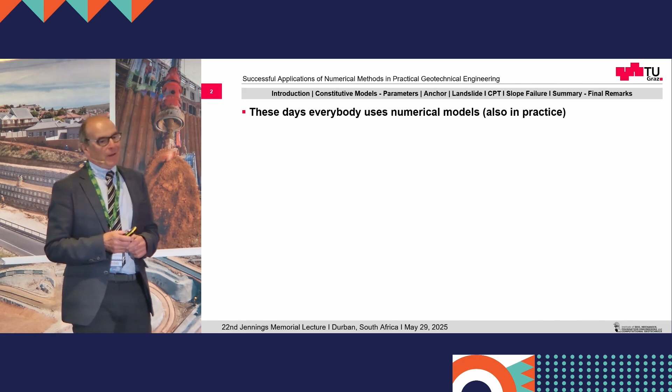Now, I'll start probably a little bit controversially by saying these days everybody uses numerical methods. But is it done because your client asks you, please provide a few nice, colorful pictures? Or do you really do it to get a better understanding of your problem? Now, I can see that there's still a bit of skepticism about the usefulness of numerical modeling amongst practitioners. Some people say, well, we don't have the parameters, etc., etc. There is skepticism about it.

But the goal of this presentation is to show you that numerical models can provide useful insight into practical problems. And that's why I keep most of it on showing you what we can do in practice, although I will give a bit of

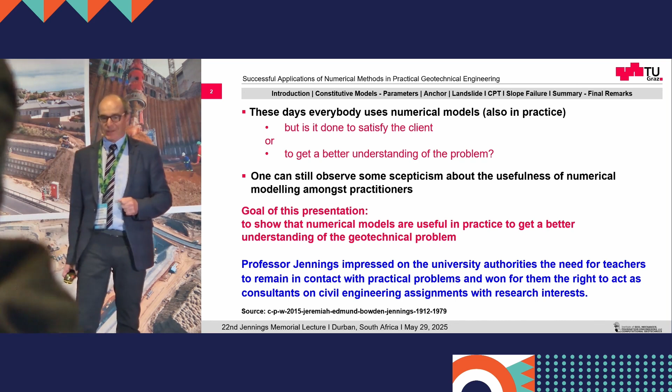an introduction. Now, I tried to link this to Professor Jennings, and I found this quote: when he was professor at the university, he insisted, obviously, that he's still involved in practical problems. And I think that ties up, or at least I try to tie up this with my lecture, because I'm also at the university, but we try to keep in contact with the so-called real world and provide solutions for them based on the research and teaching we do.

Now, the outline of the lecture will be: I give a short introduction, and I make a little bit of a note on constitutive models and parameters, because that is still something which causes some issue at some stages.

But at the end, I will concentrate on these 4 examples: an anchor load test, a slow-moving landslide. I on purpose call it slow-moving, because in Austria we sometimes tend to call everything we don't understand creep. But it's not only creep, it's much more to it. I had a lot of discussion on that in the institute sometimes.

Then I do a bit on a cone penetration test, and finally I finish off with an analysis of slope failure, again showing that numerical methods can do better than conventional methods. And then I come up with some final remarks.

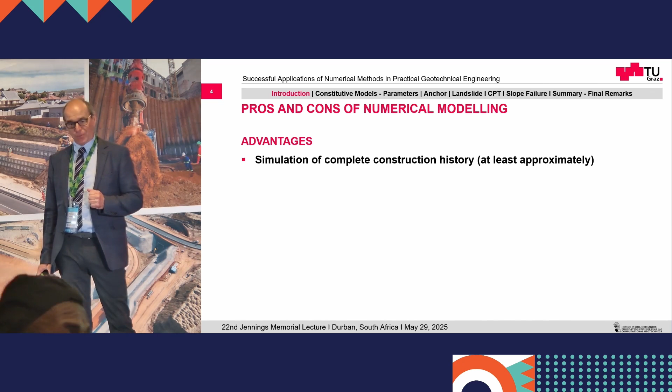Now, if you look at pros and cons of numerical modeling, the advantages are clearly you can simulate the complete construction history, well, at least approximately. I usually tell the students, or if we give courses for engineering companies, that if you are the one responsible for the analysis, if by any chance you have a chance to go on the site, then please go on the site. It looks slightly different than on the computer, okay? But at least approximately we can do everything.

The nice thing is we can do the interaction with water rigorously. That is a big advantage. And of course, you can do drained analysis, undrained, consolidation, etc. This is not a big issue anymore today. It was some time ago, but now all the codes available commercially can do that.

You can model almost any geometry. I will show you just a few slides in a few minutes. So there's almost no restriction on the geometry. If you have advanced soil models, they will capture important features of soil behavior. No model is perfect, I come back to that also in a minute. And you can take into account soil structure interaction, which is also very, very important. So all these things you can do.

And on top of it, if you look at failure, you don't have to postulate any failure mechanism. It will come out automatically from your analysis, which is quite a good feature, I would say.

Now, a colleague of mine always said there's no such thing like a free lunch. Okay, so if you get invited for lunch, then the guy wants something from you. And that's the same thing here. There's nothing for free, okay? You have a few disadvantages.

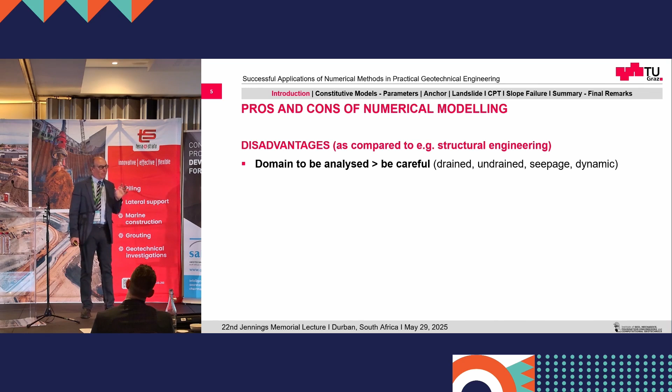So, for example, and that may look strange for you at the moment, but the domain to be analyzed is in geotechnical engineering not so clear. If you have a structure, if you have a bridge, you have the bridge, you have the geometry, the material, you have everything. But in geotechnics, if you have a deep excavation, a tunnel, how large is the influence zone of your structure? It's not always that cut clear.

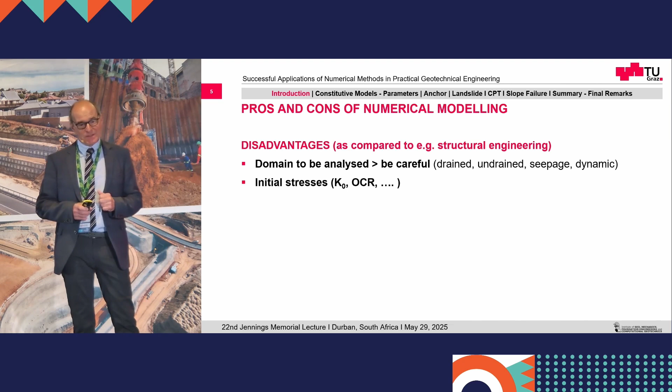Again, you have to be careful when you do a drained analysis, an undrained, seepage, dynamic. This also poses challenges on your domain. Initial stresses are sometimes difficult to assess. So we have to interact with the geologists and with experience with the rock mechanics guy to get at least a rough estimate of K-naught, the initial stresses, OCR, etc.

There are always some uncertainties in ground profile and groundwater conditions, even if you have a perfect site investigation. I assume that you in South Africa also don't have a perfect site investigation, as we don't have in Europe. You always miss something. And that is there, but we can live with that, I would say.

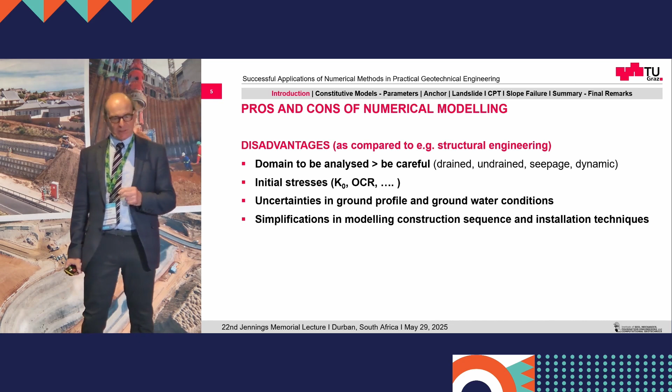We have simplifications in modeling of the construction sequence, I mentioned that already. And more importantly, in ground engineering installation techniques, we are still struggling in modeling construction of stone columns, etc., mixed in place, and so on. People are doing this in research, but it will take some time before that comes into practice.

So although the solutions are approximate solutions, that is always one we have to keep in mind, all numerical solutions are not exact solutions. But that's no problem, because we don't know the exact solution anyway. Because if we have a deep excavation here in Durban, who knows the exact solution? And actually, we don't care. So we have to have a good solution. It will be approximate. And that's why I think the pros really beat the cons.

Now, just to make clear, I'm concentrating here on the finite element method. But of course, you can find a finite difference method for people who use FLAC. To some extent, boundary element method, and also we have this discontinuum-based methods like the discrete element methods. They use it quite a lot in rock mechanics, but you can also use it, for example, in investigating soil behavior at a small scale, like investigating detailed grain-to-grain contacts, etc., in laboratory testing. But I'm concentrating here on the finite element method.

Now, just to show you the development we had within 35 years, this was finite elements in geotechnical engineering 35 years ago.

It's part of my thesis, actually. We had 20 elements, 25 elements, and for these meshes we had to send it overnight to the computer center in Manchester. You won't believe it—today if Rocscience or Plaxis or any other code had an Android version, you'd actually solve it in the coffee break on your mobile phone. So that is what we had: few elements, very simple constitutive models, no user-friendly codes. I remember the students, when we started doing this, after 6 weeks they probably got the first results because they had to fiddle around with the mesh and everything.

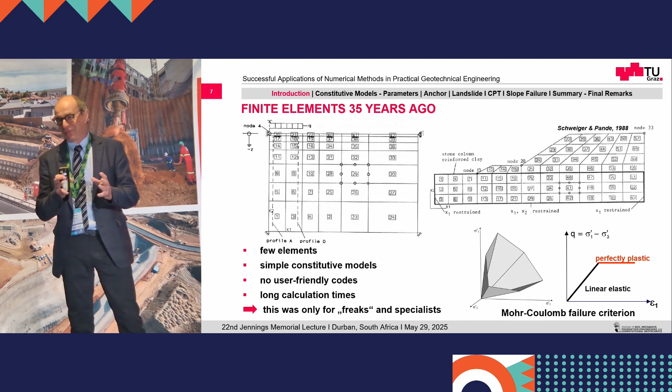Now we have this, now this is different. So this was really for freaks only, okay? I think you call it nerds these days.

Now, the last sentence here is: everybody can do it, but not everybody understands it. So when we give courses for practical engineers, sometimes we realize that they, in particular the young guys, are very nice in handling the code, but don't always understand what they're doing. And that is what is important. It is only a tool. Finite elements won't solve any problem for you—it's just a tool to solve it.

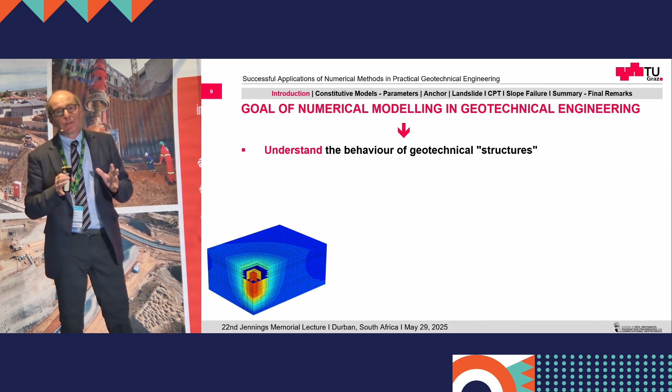Now, to sum this up, the goal of modeling is to understand, and that's what I put on the first line here: understand the behavior of geotechnical structures. So don't be too picky on the numbers in the first place—try to understand the complex behavior of your system. But of course, at the end, we want numbers for design: we want to calculate the displacements under working load conditions, we want internal forces for design, and we want to identify possible failure mechanisms. Now, I think we can achieve this.

But we need appropriate geotechnical models in the first place. So that is what I want to emphasize here. Before you go into the computer, you have to really consolidate all your knowledge, wherever it comes from, to make an appropriate geotechnical model, because already there you do some simplifications. You will never be able to model your soil profile or your situation in a perfect way.

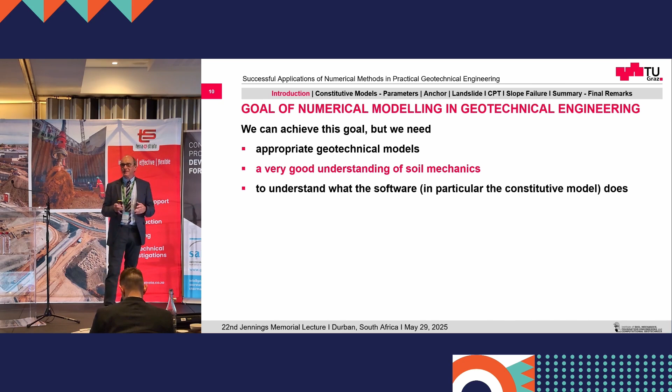And then this is again in red: you need a very good understanding of soil mechanics. Some people think, 'I buy one of these codes, that's fine, and I get rid of all the soil mechanics'—but no, it's not. You need a proper understanding of soil mechanics because you need to know how you transfer soil mechanics principles into computational geotechnics, and you have to understand to some extent what the software does, in particular the constitutive model. You don't have to be an expert in solving equation systems of 1 million unknowns—that's done, the codes will do that automatically—but you have to understand some principles of how the code works.

And you need a clear picture of what you can do and what you cannot do. Again, I put it in red here: we do models, we do not do reality. We try to put reality as close as possible into our model, but it will never be perfect.

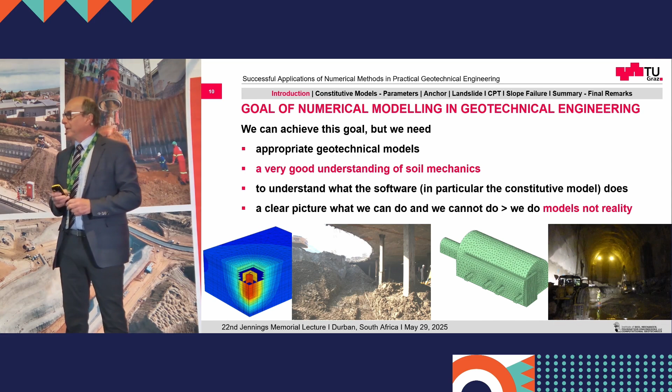So this is an example here, I think, from an excavation with a deep foundation in Bucharest—if you look at the site, it doesn't look like this on the computer. And here, for the big cavern we did for a power station, it's all inside the rock. This one we did a couple of years ago; it took about 10 days to run because the client wanted all these adits and things put into the model, and we had about 180 construction phases to model. So that was it.

Now, just a few words on the constitutive models.

Many people still think we can get away with Mohr-Coulomb. Now, Mohr-Coulomb, strictly speaking, is not a constitutive model. It is a failure criterion, and as such is not too bad, for drained conditions.

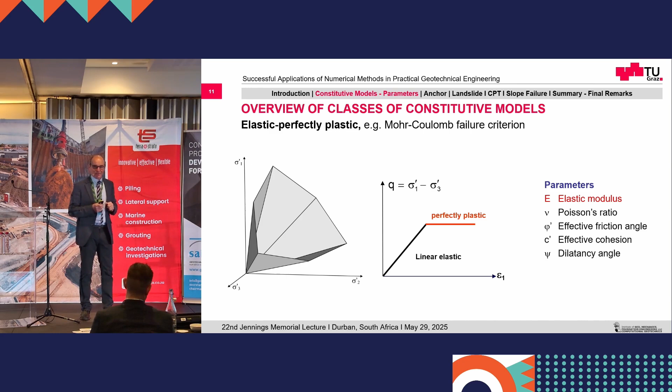Now I'm questioning you a bit. So the last line here - if you do a geotechnical report, how many of you define the dilatancy angle? Hands up. I think it's about zero. But I can assure you it's the same thing in Europe. Okay, but once you do your analysis, you have at least to think about it. Don't take what the codes do as a default value automatically.

Now we're doing better. If you just want to go for failure, Mohr-Coulomb may be fine - again, only in drained conditions, not so in undrained, in particular for normally consolidated soils.

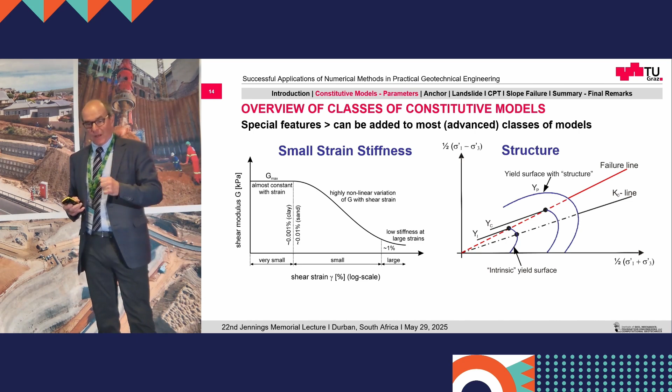Now, something which I do not understand - why it is not more popular - is to take into account structure. I will show it in the CPT example later on. This is clear that most clays in situ have a structure, and you can model that relatively easily by just introducing a second yield surface on top of the intrinsic yield surface.

So I would say for standard problems like tunnels, deep excavation, basically the constitutive model issue is more or less solved, I would say. Well, there are some details, but once you go into cyclic loading, offshore, and these sort of things, you have to be careful, and there's still a lot of development going on.

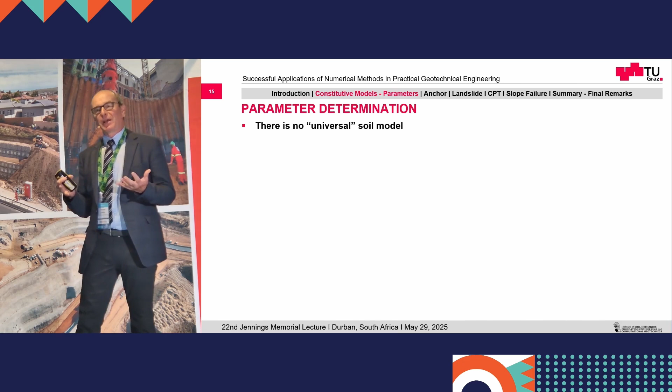Okay, now parameter determination. That's an issue which sometimes prevents the application of numerical models in practice because people say, well, I don't get the parameters. Now, first thing - there is no universal soil model. So if any researcher or company wants to sell you this is the model for soils, forget it. It's not true. We have models which work better for sands, which work better for clays. We have models who work for both reasonably well, but there is no universal soil model.

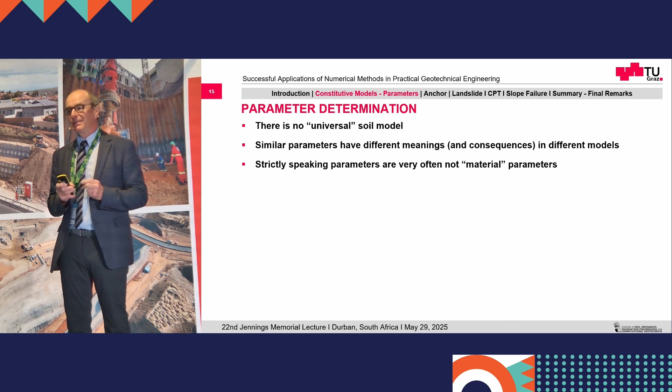The problem is sometimes that similar parameters have different meanings and consequences in different models. That is what I meant earlier on. You have to understand what your code does with your parameters in a particular model. Strictly speaking, when we talk about material parameters in geotechnics, they are not always real material parameters.

Let me give you a simple example. If you have a quartz sand, the material is the same whether it's in a dense or loose state. But if you use a constitutive model, you will input a different stiffness for the loose one and for the dense sand. So if you go to the mechanics department at university and tell them this, they say, what are you doing? These are not material parameters, this is a mixture of material and the state the material is in. So that becomes a bit tricky.

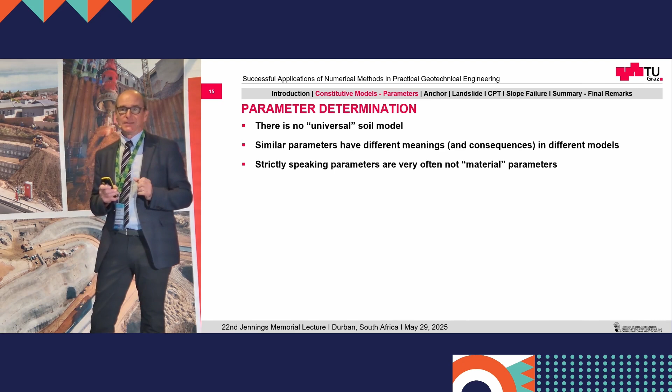There are models around that can do that, but they are not easy to handle. So from a practical point of view, we are used to living with these assumptions and simplifications, and there's nothing wrong as long as we realize our limitations. If you're aware of your limitations, you will do the right thing.

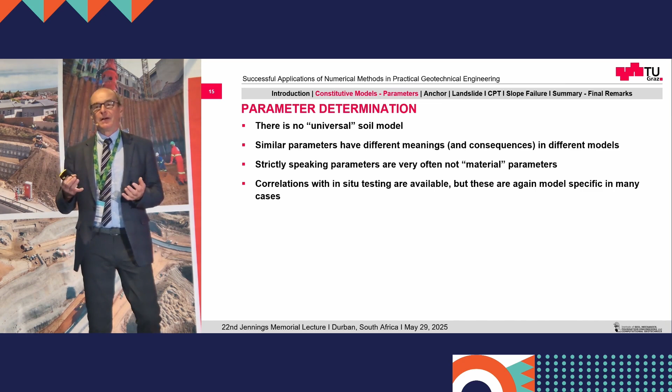In situ testing - I'll come back to that in a minute. The problem we have in laboratory testing is sample disturbance. For example, a typical soil we have in Austria, from the oedometer I have to multiply the stiffness by 3 for the finite element solution, because otherwise the client says if that's correct, I cannot build it. We know it's not true, because the soil is very difficult to sample, so we need some adjustment on that. So I'm a little bit more in favor of in situ testing, and I'll show that later on. It's also not straightforward, but I think you can get something out of it.

This is an issue that comes because usually when you do the site investigation, you don't know what tool you will use for the design, so you cannot steer the site investigation to get the parameters you need for the model. That's just how it is.

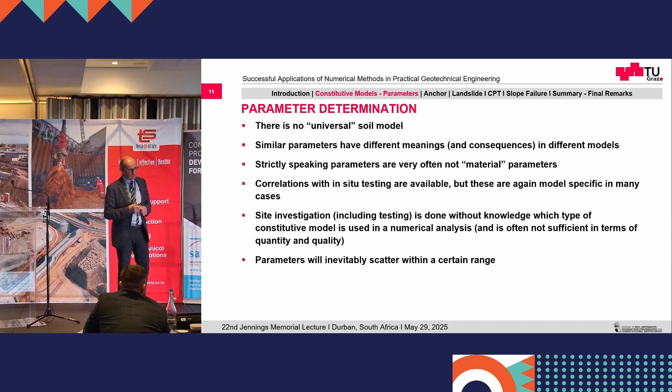Of course, whatever we do, our parameters will scatter within a certain range - there's nothing we can do about it. So this objective parameter determination for advanced models is actually not a trivial task. But a couple of people are working on it now, and at the very end of my presentation I will come back to that.

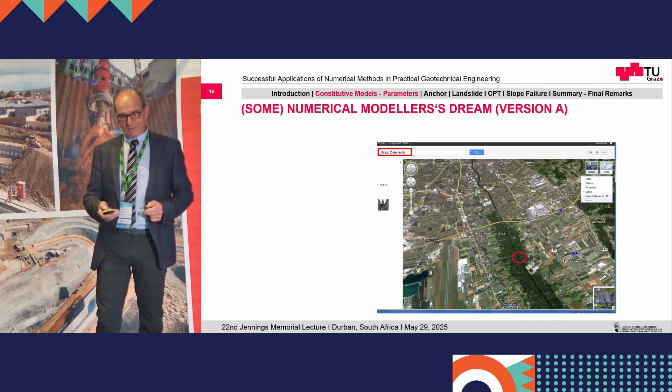First, let me show you something some young guys I know dream of. You go to Google Maps - sorry, I put my hometown, not Durban - you say this is the site here, you click on the site, you get a profile of your layers. That's already available in some places. But then you click on one soil layer, choose model A, B, X, and then you get all the parameters. That would be the dream, wouldn't it? Okay, it's not like this.

And I like this report from Mayne and others - is one number enough? I think that's really a question. You get a CPT, you get an SPT, you get one number, and then you build everything around it. I think it's not a trivial task.

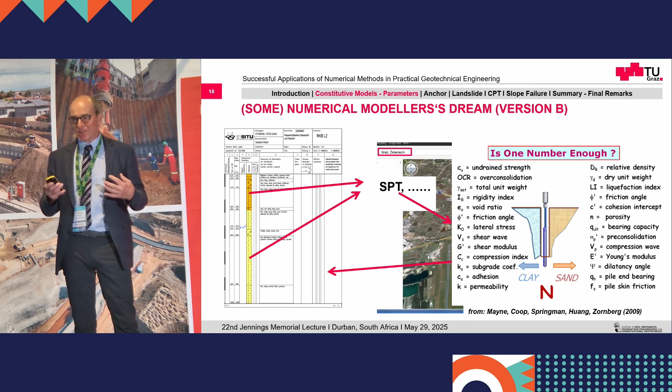Now people doing machine learning, neural networks, etc. are improving it, but I'm still a bit careful. One of the PhD students of my colleague is doing it now with in situ testing, with input parameters from a CPT.

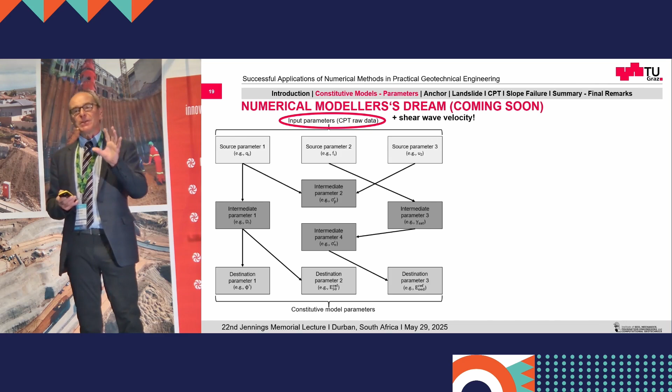So he gets raw CPT data, plus - and that is something I would really encourage you to do - if you can do a CPT, if your ground conditions allow, do a seismic CPT. Because then you get the shear wave velocity and the shear modulus at very small strains, and that is already a parameter from which you can build up the rest.

So what he does is he has programmed all the correlations he could find, and at the end he wants to get the constitutive model parameters. He called it an automatic parameter determination, using graph theory to get from one part to the other. And of course he has to input some restrictions so that you don't use a correlation which is valid only for clay and use it for sand.

So in the first step he's doing a layering. You can choose at what thickness you choose the layer from the CPT, and then he picks up that. But still, at the end, he may have 5 correlations for this parameter, so which one do you take? It's still a bit tricky to do, but that's something he's working on.

The one good thing is you can check how you arrive at the different parameter - it's open, all open. So you can check and trace how it arrives at a certain parameter. There are other people working on similar tools for this automatic parameter determination. It will be a step forward, but I see there's still a bit of work to do.

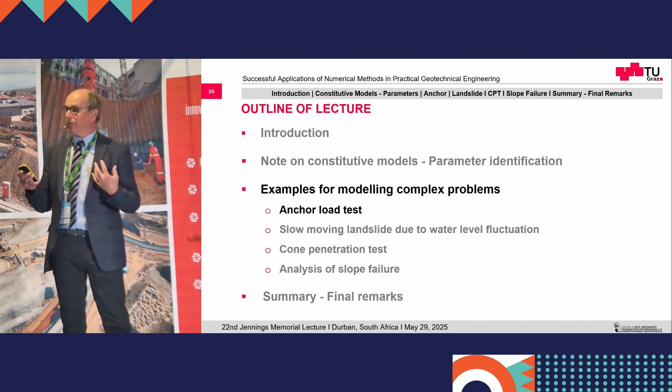Now, after this introduction, I will show you 4 examples. The first one is an anchor load test. And that was an anchor test only for research purposes, so it was not part of a construction.

So what we did is we installed the anchor vertically. And the nice thing here is that it was a ground anchor, so we had 12 meters of free length, 8 meters of fixed length, and 6 strands.

Now, it was part of a PhD of Carla. She came from Brazil, and you see here the snow. On her birthday, she had to accompany this test, so she remembers that for a while, I think.

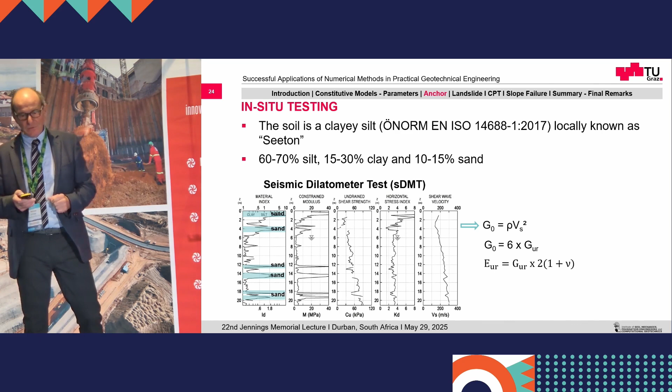Okay, so we had some site investigation because it was near a railway line construction, so we had a bit of site investigation. We did a CPT, we had a seismic DMT, and that means from the G0 we could work our way through G and GUR and EUR. For those of you familiar with this, we were using the PLAXIS hardening soil model here.

So since it was vertical, we could model it with an axis-symmetric model. We increased the K0 along the fixed length due to the grouting of the bonded length - we increased the K0 to 1. That's something we usually do. We have prescribed displacements at the top of the fixed length, so we didn't model the full free length, of course.

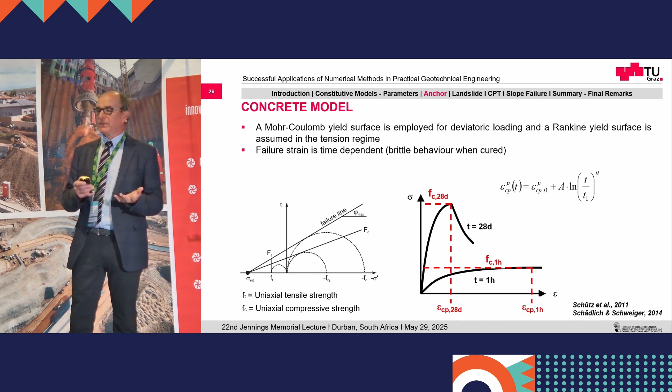Now, what we did with the grout, we modeled that with a model for concrete which was developed originally for shotcrete. So it can take into account the evolvement of stiffness and strength with time, but we switched that off here because one of the features we input into this model was that it could crack. So we had the peak strength, and after the peak you would have a decay of the tensile strength roughly to 0, because we wanted to see the development of the cracks in the bonded length.

And you need to remember this parameter HT. If HT is less than 0, it's still without cracking. If HT is between 0 and 1, it is cracking, and if HT is at 1, then it is at failure. So these were the parameters - I think I'm not going into much detail of that.

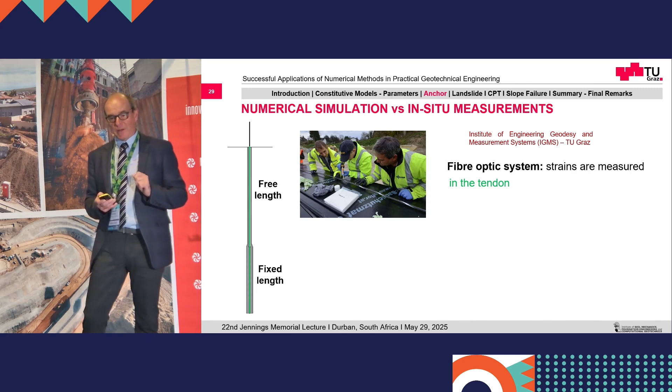Now, you would say, well, there's nothing new - I mean, we do fiber optic sensing, that's quite common now, and I think it's a game changer in monitoring. But what we did here, we applied the fiber optic sensors on the tendon, but also in the grout. And I think that was pretty new, because on the tendon some other people did it, but we wanted to check what happens in the grout as well, in the fixed length. So that's a bit of work on site, of course, because it's quite tedious to apply all this, but we did this in cooperation with Keller.

We got information on site and did the analysis before the test. When I saw this, I said I could retire because it won't get any better. But a couple years later, we realized we hadn't accounted for creep measure—when you do a load test, after a certain time you get 2 millimeters of creep and call it failure. We didn't take that into account, which is why it's a bit stiffer.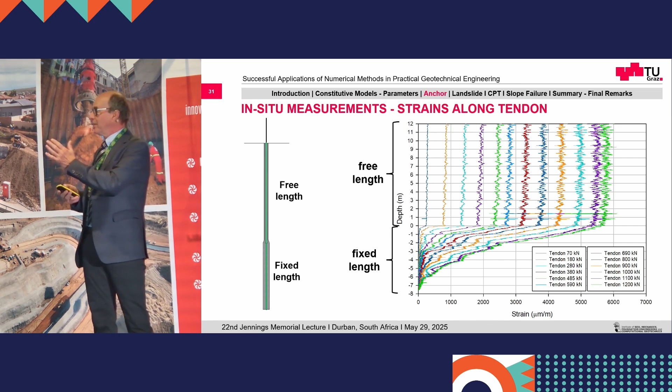But overall I think we did reasonably well. The nice thing from these measurements is you see the full anchor with the free length and fixed length, and from left to right it's increasing load. You see how much of your bonded length is activated at a certain load, and at failure the whole bonded length was activated—that's what you expect, though you wouldn't design for that. In this particular test, we could take it to the far end, which is very nice.

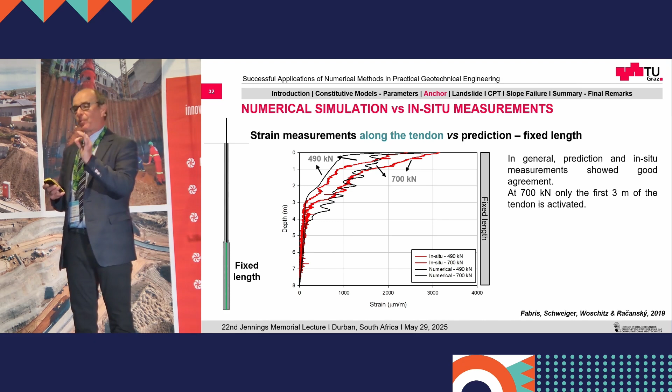If we compare at two different load stages the in situ measurement and the numerical analysis, we see quite good correlation. This zigzag is because at some stage we experienced cracks. The model we use is what structural engineers call a smeared crack approach—we cannot follow how the crack develops, we can just say this stress point has cracked. That is a limitation.

These oscillations in the measurements indicate cracks, and that's what you see in the analysis. I plot the HT factor here, which I mentioned before, and at higher levels you get a very high number for the HT, meaning you are fully cracked. That gives us some idea how these anchors behave.

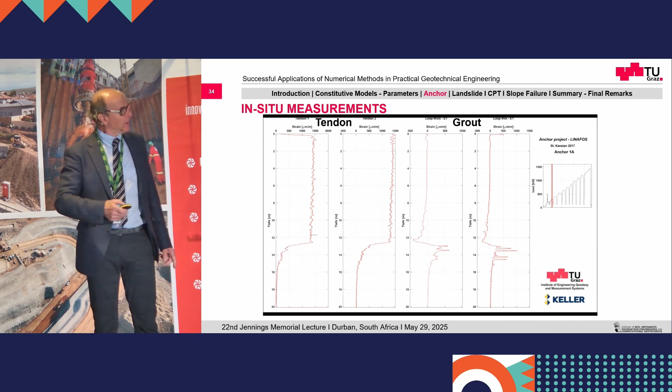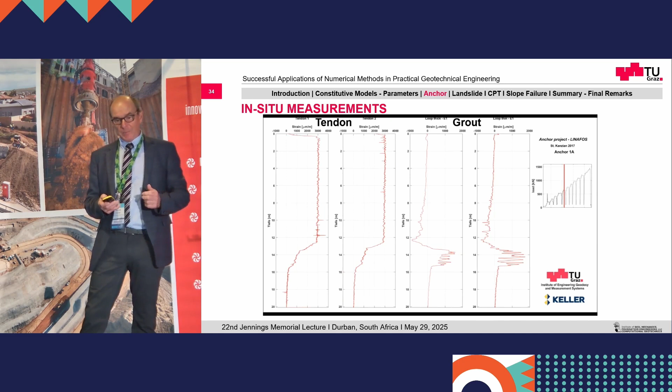I'll just show a bit of what you see on site—it's quite impressive. On the left-hand side there were two sensors, on the left and right, and in the small picture you see the applied load, unloading, and reload. You see the cracks coming in at some stage and how much you mobilize from your bonded length. To get the numbers right you need quite a bit of post-processing, but on site you can already get a feeling for what's happening. I'm not playing the full picture since it runs 2 or 3 minutes, but that's an indication of what you see on site.

In this research project, which I won't elaborate on further, we tested different conditions: clay silt, gravel, and rock. I'll show the comparison for the Seeton—German for clay, though it's actually a clay silt. We had about 1,200 kilonewtons and fully mobilized the bonded length.

But doing the same thing in rock, on an anchor from a real construction site, it only took 3 meters to get the load in. Usually you'd associate that with strength, but that's not entirely true—and I think that's something worth raising. In geotechnical engineering we often don't think enough about stiffness or relative stiffness, between a support and the soil. Here again, how far it goes is influenced by stiffness and not only by strength.

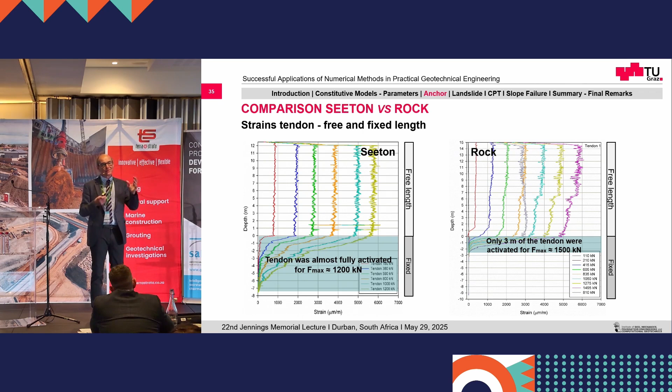6 meters? Okay, not bad. So this guy here was using 10, I don't know why. But you know, you could use these measurements actually. If you do it on site, you could actually see really what's going on with site measurements.

Now, second example: slow-moving landslide. These are issues we have sometimes. So there's a reservoir here from a pumping station, and there's a slow-moving landslide. Of course we measure - it's quite 270, 220 meters.

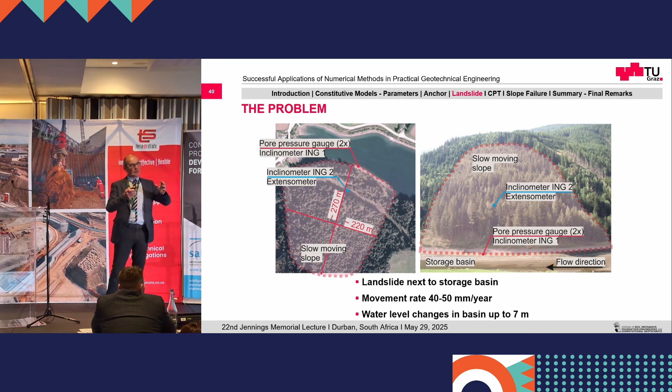Movement rate roughly 40 to 50 millimeters a year, and the water level changes up to 7 meters. It's one of these stations where you pump the water back and then you have the water level rise. Now, of course, they don't like to move the slide into the reservoir.

That is not what is expected. So of course you put inclinometers, pore pressure measurements, etc. So that is at the basin itself. We had similar soil as we discussed in the anchor - fine sand, silty clay, etc. We had pore pressure measurements there, and we had inclinometer measurements as well.

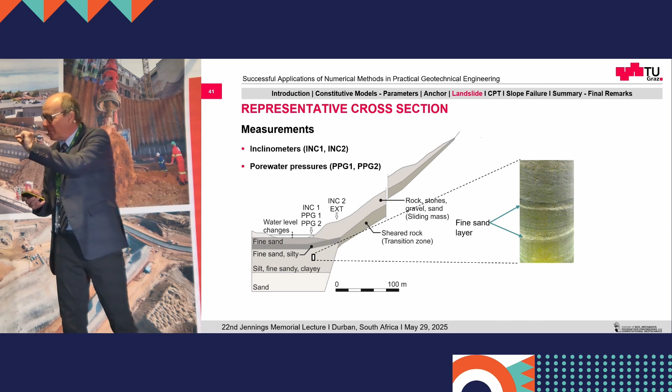So sometimes in these clay silts, we have very fine layers of sand, which makes it quite difficult to judge whether we should go undrained or not, because you will consolidate a bit during construction. So we had competent rock there, then the sheared rock in the transition zone, and the sliding mass. So we had some measurements.

And what we figured out when we measured is that we had excess pore water pressures in the subsoil, depending on the water level velocity. Now, what I mean by excess pore water pressure - you see the black line here is the water level, and these ones will be the static water pressure. But when we measure it, when you change the water level, you don't straight away get the static water pressure.

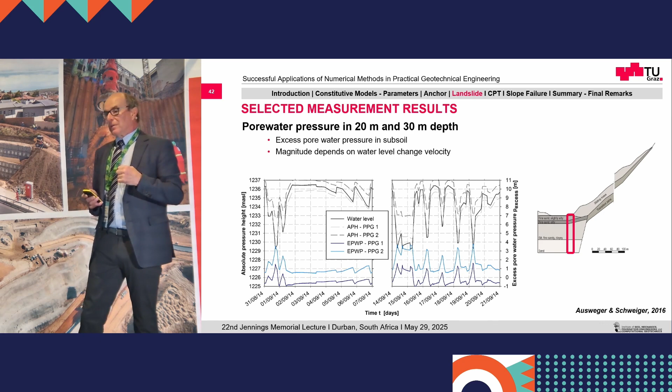Now, there are several reasons for that. Sometimes we think the sediments in this basin are probably not yet fully consolidated, so you will still have some pore pressures, but also you may have air bubbles in the soil - in the water, sorry. And then, of course, once you have air bubbles, the water becomes compressible, and then you have a delay in when the pore pressure develops. So it makes a bit of a change how fast and how high you change your water level.

Now, when we look at the inclinometers, you could see that when they increased the water level, they have an increasing displacement rate, but the precipitation, rain, etc., did not make that much of a difference in this inclinometer position at the toe of the slope.

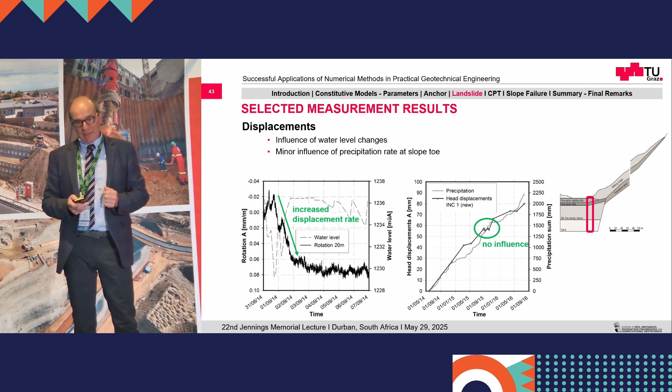So what we tried to do - well, I'll come back to this one first. So that is what some people call a quasi-saturated soil. It does not have a continuous air phase that we usually deal with in an unsaturated soil, but we have a quasi-saturated soil with some air bubbles in it, which means you have compressibility, and you can take this into account these days in the numerical models.

Then we were asking ourselves, well, is there some creep in these lacustrine sediments, which we could expect? So we used the soft soil creep model for that. Well, there's nothing special on this one. We had some data - CU triaxial tests, oedometer tests - and we came up with a reasonable set of parameters, what we hope is a reasonable set.

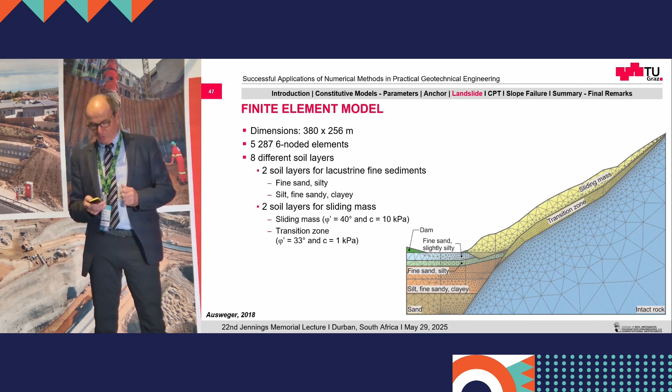Then we built the model. And what we did is we built it up. First of all, for the transition zone, we had to find out or estimate the degree of saturation, and then assume something for the relative permeability, etc., because we wanted to model the whole slope and see what influence different issues have on the deformations of the slope.

So what we did - we started with the intact rock, then activation of the sediments, did some consolidation on the sediments, then we were activating the sliding mass, and then we had a creep phase of 4 years, and rainfall and water level changes for about 1 year.

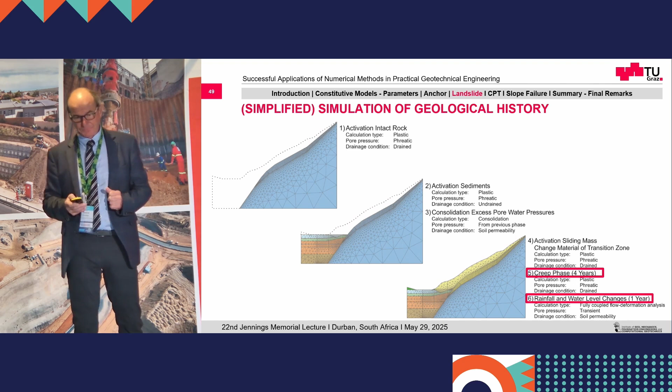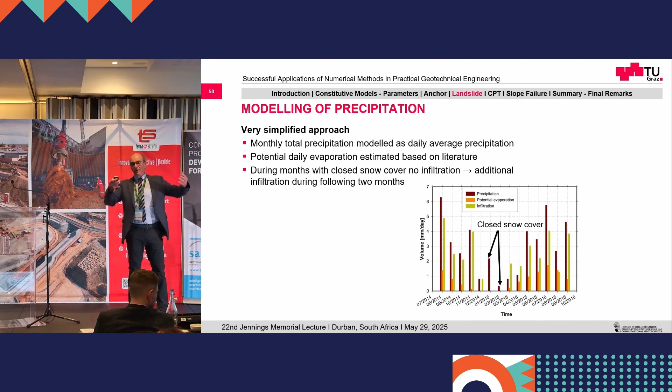Now, of course, we had some data on rainfall, snow, etc. But what we did is we made this very simple. Let's say we modeled the total precipitation roughly as an average precipitation, evaporation based on literature. And what we did, in the months where we had snow covering, we said we have no or very little infiltration in the months when the snow was melting. We had then a bit more. Of course, you may argue we have to make a lot of assumptions here. That's correct, but at the end, I think we managed to do reasonable.

We had measurements on displacements on the slope. And the goal was now, and that is nice I think with numerical methods, because if you need measurements, you need monitoring, but when you look at the monitoring results, you cannot really distinguish where it comes from. Did it come from the creep? Did it come from the rainfall? Because you just have the measurement, that's it.

But the nice thing when you do this numerical stuff, you can say, well, I switch off this, switch off this, switch off this, and see what is the contribution of each of the factors. So we looked at creep, dissipation, precipitation, and the water level changes. And what you would probably guess is that these four factors are not equally important for all the points. It will depend on the location. And that is what we did.

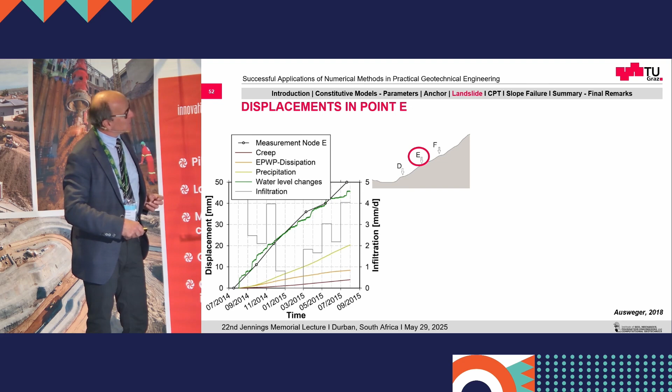So you see here, this is measuring point E. And you see here, that's the measurement, the node. These ones are the measurements. The green one is the end of what we predicted. But we then split it up: the creep part was that, the dissipation part is this, the precipitation is this, and the water level changes is this.

And then we did it for the three nodes, and you see now that it's different. So the creep is more important in the lower part because there is the sediment, and the precipitation is more important on the upper part. So we have node E, node F, and the water level changes that are roughly more or less the same.

So I think that is something you could explore. You know, you can play around. I know in practice, time is money, and the client is waiting for the result. But still, you know, you can do these things maybe overnight, just change one thing.

That is what we always do. If the client pays us for 3 analyses, we do at least 6. Some of them we just change overnight and see in the morning, is this roughly the same or is something different? Because we had a couple of cases where when you change one parameter a bit, you get a completely different result. And then you have to warn the client and say, see, if I change that a bit, are you sure that it is this value? Because if you change it a bit, the behavior may change. These things happen, you know?

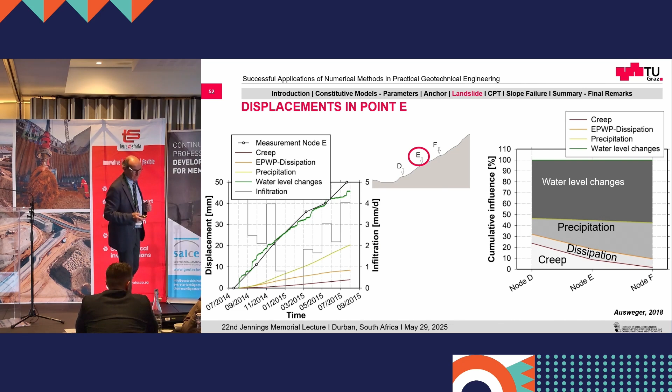Okay, well that was in point E. That's the same thing in point D and F as well. So I think we did quite reasonable on that, and we gave them some hints how they should do the water level changes, if possible. Because sometimes, you know, but at least they are aware of that. If they're doing it this way, it will be less favorable than if they would do it the other way.

Now, final word on this one. What's a factor of safety? Peter is laughing. What's a factor of safety of a moving slope? I think we probably can spend the whole day just discussing this. Some people say, well, it's failing. Some people say it's roughly 1. Well, I think this factor of safety business is something we invented, the engineers invented, to work with it, but it's a difficult story.

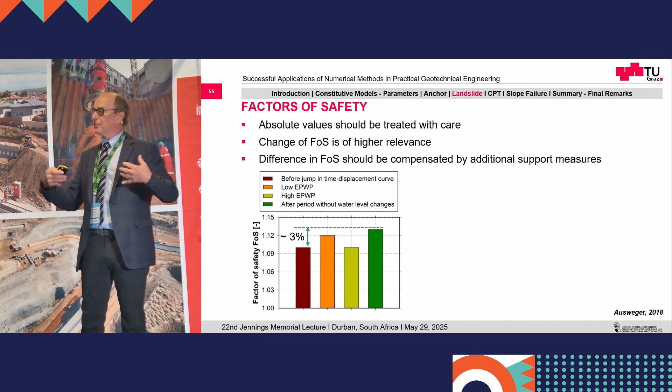Okay, so sometimes, probably you have the weird situation here as well. Sometimes the authorities, they think, well, if you do some cut, or like in this case, you do something and the soil is moving, you have to do some measures to support the slope, and you have to reach 1.25. But the slope was, at the beginning, if you calculate it, 1.03 or something. To bring that back to 1.25 is sometimes not possible because the mass is just too large. So what we sometimes say is that if you do something to it, you have to provide the support measures in such a way that you don't make things worse.

And here again, we checked a bit what the factor of safety is, and you see you're talking about percent. It's very close. It's very difficult to assess that with numbers you would find in the standards. So we also checked the inclinometers, and we got that also quite reasonably right.

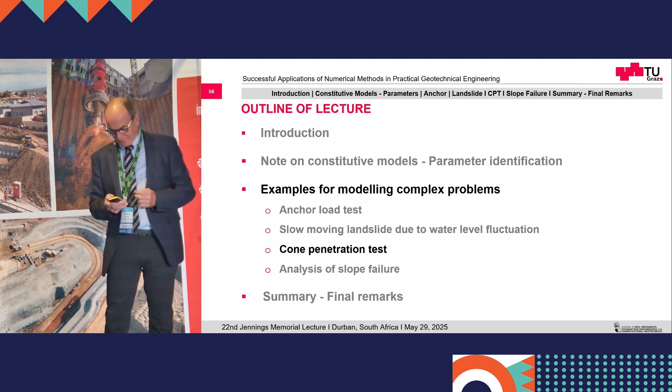Next example, that's my hobby at the moment - I still have a PhD student working on cone penetration test modeling. Now, forget about any standard code, it won't work because you have large displacements, large strains, your elements will distort, and the code will blow up immediately. Some people do it with a trick - they make a small gap in front of the cone and remove that, so I don't like that.

So what we are using here is what we call the particle finite element method, developed in Barcelona, UPC and CIMNE. What we do here is a fully coupled analysis, saturated - we can do only saturation in this case, and in this presentation I'm only showing the undrained condition.

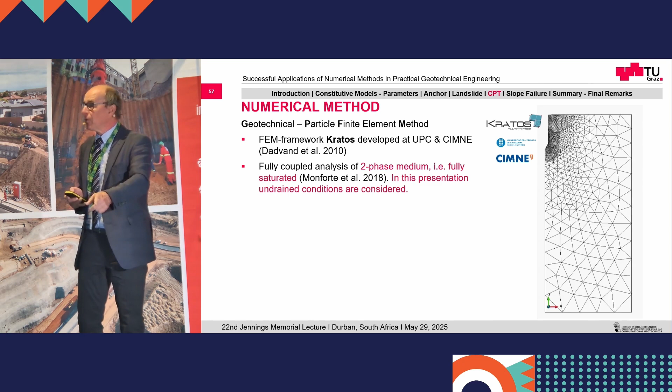So what we do is we continuously remesh. That is for the numerical guys amongst you - it's an updated Lagrangian formulation. You make a new mesh every time. You have some measures when you do the new mesh, and you transfer state variables and information from one mesh to the other. That's not a trivial thing - that's why it took quite some time before these methods became available. There are other methods around, MPM and so on, which can do similar things, but it's not trivial how to do that.

Now what we use here is very simple elements, because the meshing becomes tedious if you have very high order elements. So we use very simple 3-noded elements, but they lock - that means they don't give nice results in undrained conditions. So that is what is called here a stabilized mixed formulation - we have the Jacobian as an unknown as well in the formulation. We do a frictional contact between the cone and the body.

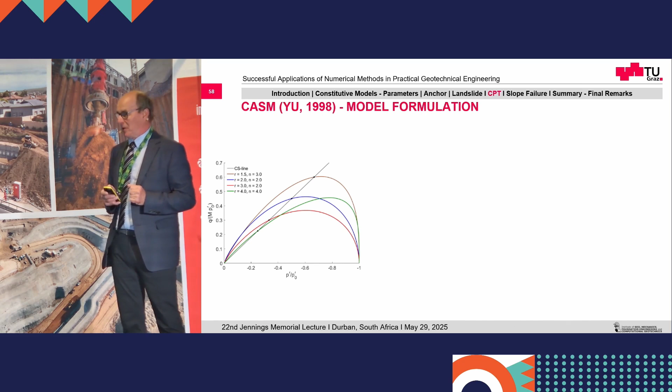And as a soil model here, we use the clay and sand model, including destructuration, and that's a point I want to make here. The clay and sand model from Yu is basically a modified Cam-Clay model, but you have additional parameters so you can distort the modified Cam-Clay ellipse a bit, and then you get different undrained shear strengths, etc. It's a reasonable model, I would say. It has a state parameter - that means it checks the state at a given mean effective stress, the distance to the critical state line.

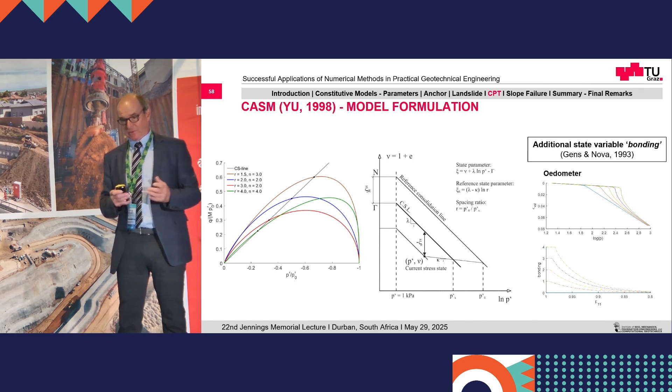And that is what we added to the code - we can do it now with the structure. Now, as I said before, this is available since '93, so that's quite a long time, 30 years. Gens and Nova presented the work on how you deal with structured clays in a constitutive model. It's pretty straightforward, and is still used by many people using structured soil. So basically what it means - if you have an oedometer, at a given void ratio you can sustain a higher vertical stress than without the structure.

But once you destroy the structure, you will come down to what we call the intrinsic normal consolidation line. So that is what we put in, because we wanted to check what happens during penetration with the structure. And this DH parameter here means, in easy terms, how fast the structure decays. And of course, it has a volumetric term and a deviatoric term - so a volumetric and a shear term.

Now, splitting the two is not that easy - there are few papers around, but not that many, because it's not so easy to determine experimentally what is what. So we had to play around a bit, but when you see now on the right-hand side, B0 here is the amount of structure - it's a number which just tells us how much larger the yield surface is compared to the intrinsic one. And H is the rate of decay of the structure.

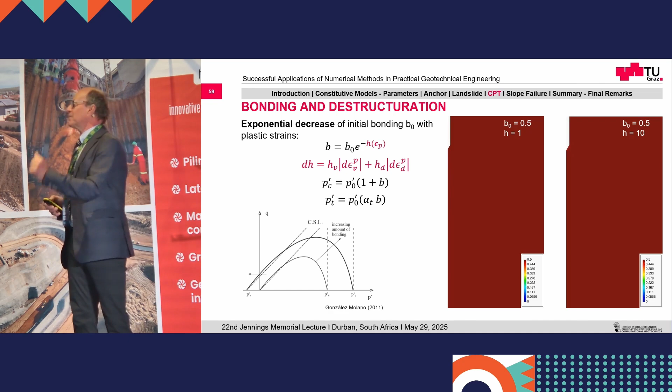Now some people will say, well, why do you bother about it? When you do a CPT, you will destroy the structure straight away, you don't have to bother about it. I argue it's not the case.

Because, first of all, you see here this parameter at the vicinity of the cone. Now, of course, if you have a high destructuration, H is 10, you will destroy the structure in a wider area near the cone. If it is not very sharply decaying, then it will only affect a small area. Now, when you look at the tip resistance, it is not only influenced by the vicinity of the tip - you need a larger bulb which is reflecting the tip resistance. So I think it is important to take this into account, and you see in the next slide what happens.

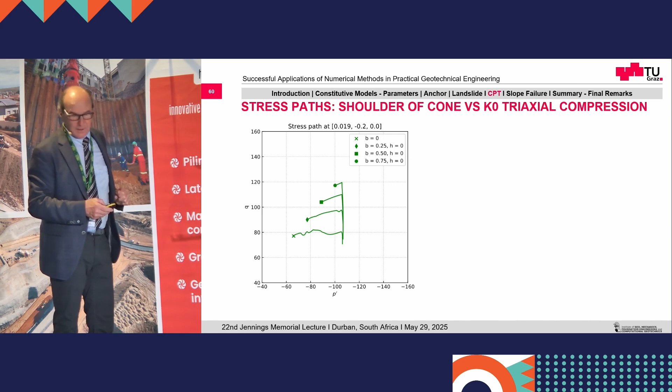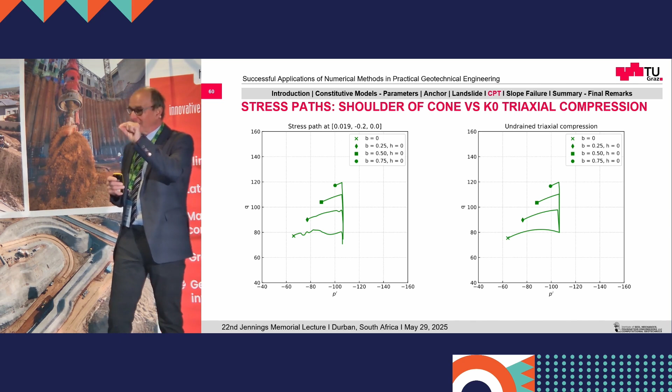Once you pass the tip, you get a stress state near the tip, on the side of the tip, which is roughly triaxial compression. That was one of the first tasks the student did, which was not trivial, because when you refine the mesh all the time, it's difficult to have a fixed point to compare. So he introduced fixed points where the remeshing always had to have a node, so we can look at results there. By doing that, we figured out we have roughly triaxial compression.

So these are different degrees of structure. You see 0.5, 50, you get different undrained shear strength. So what we did, we ran the CPT with different structure and looked at the results.

Because we did the same thing with the same parameters, we did the triaxial undrained test first. We said this is our SU, so we did it the other way around. We tried to work out the NKT. Usually you guess the NKT, and then you know the SU, but we said we know the SU, and we get the NKT.

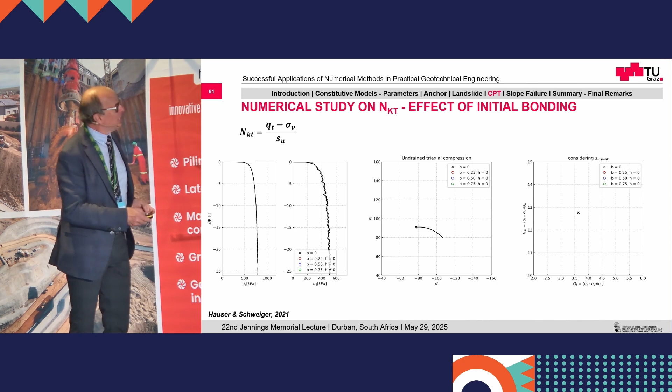Now with different structure, you get different QT, but the NKT doesn't change that much, because the increase of structure is reflected in the increase of the QT. That means if you don't manage to get an undisturbed sample into the lab, you know the intrinsic value, you run the CPT with the intrinsic values, and it doesn't match the QT, you can estimate the structure. Sounds a bit difficult, but at the end it's not that bad, and you can make this automatic, because the CPT cone is always the same.

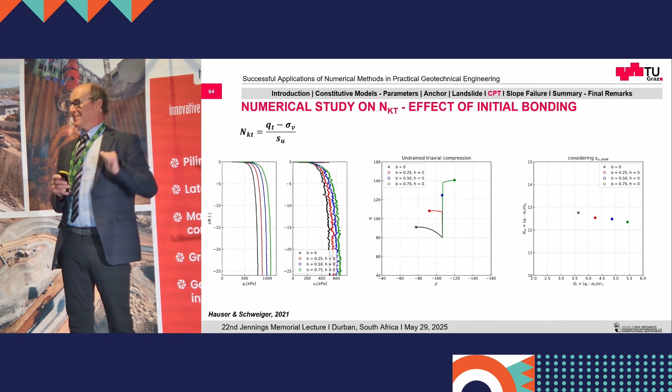So that's what it is. You can make this very automatic, and coming back to the slide I had on parameter determination, what we're doing now is combining the two students. The one who does automatic parameter determination gets in the CPT raw data, provides my numerical friend the input data, he runs the CPT, and then comes back and says no or yes. Actually it worked better than it looked like. We had one round going already. I think that would be a step forward to do it.

Now I have to speed up a bit. This is from a real site now. Again, these are the parameters. We got a shear wave velocity, some oedometer test from a block sample, so we got a reasonable quality of the sample. We estimated the parameters then from the oedometer.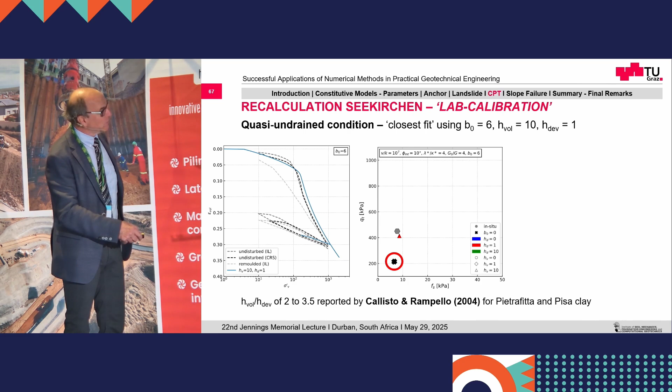And that is the result. You see the gray one? This is QT over FS. This is the result in situ. This is our numerical result. And if we would ignore the structure, we would end up here. So I think it shows it works.

We do the same thing with the pore pressure here. By the way, the U2 position, I think that's not the best position to measure pore pressure. Numerically you see it, you get a much more consistent result in U1 than in U2, because you have the corner and it's not doing like this. Okay, but that's what it is.

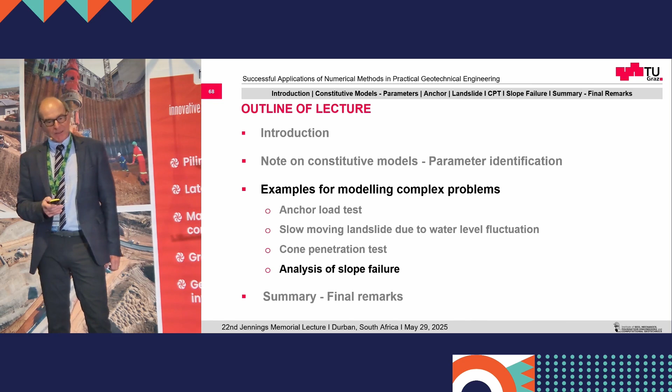Final example, it's a failure. And that is something I put in here because I want to challenge you a bit. You do slope stability, you do it with limit equilibrium, correct? It's okay, but sometimes it may not be okay. And I'm showing this example. So it was a failure, I'll probably show the cross-section here.

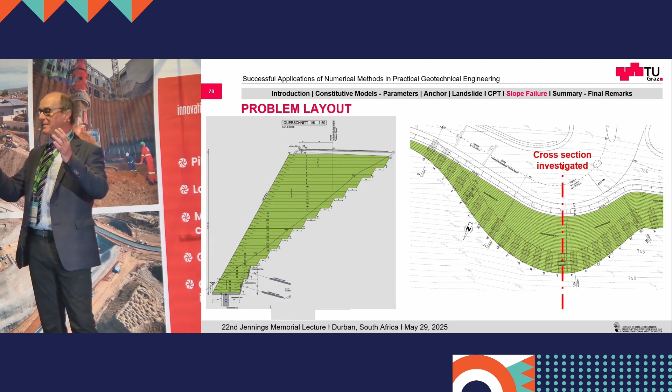There was a natural slope, pretty steep. We have slopes in the Alps, 40 degrees, so roughly approximately stable. What they did, they wanted to build a road on top in here, so they did a reinforced embankment there. The failure was not in the reinforced embankment, that was fine. They had a sort of abutment here at the end, which they didn't anchor back. Don't ask me why, but they didn't do it, because in a similar occasion, they did.

Well, that failed. And the guy who was doing the design said, well, my factor of safety is 1.3 or whatever, everything done correctly. And then the authorities said, well, could you probably check with finite elements whether you find a different result? So we did that.

Built that, so we made sure there's no failure in the embankment. Now, the strength parameters given by the geotechnical report were 40 degrees friction angle, and 0 cohesion.

Now, I know the guy who did the geotechnical report. He's not the brave guy. He was conservative, still thinking there's some cohesion, interlocking of particles, etc. But he gave that as a design parameter.

So when we back-analyzed the failure, we ended up with 40 degrees. We left the 40 degrees, but it still had to have a cohesion of 11. Even with a cohesion of 11, it would fail.

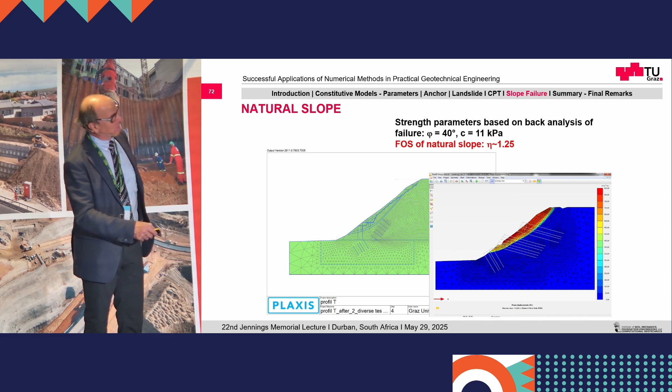So that means the factor of safety of the natural slope was about 1.25, and that is where it failed. It had about 1, or 0.98. So it failed before they reached the top and before they applied the variable load.

And this took... well, my students are really fast on doing that, so this took maybe an afternoon, not more. We just found out straight away, did everything, and it was failure. And the reason is simply, you see here the failure mechanism we got.

We did this again with what we call finite element limit analysis. It's been pioneered by the late Professor Scott Sloan in Newcastle and his group. That's basically finite elements with rigid elements. You cannot do deformations, but it's based on the theory of plasticity, upper and lower bounds. It gives you quite good solutions.

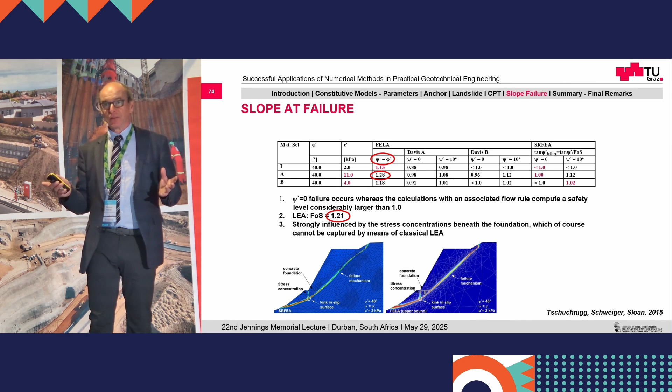So we compared that with finite elements, and what I want to draw your attention to is you get 1.21 when you assume the dilatancy being equal to friction. For the numerical guys, that's the associated flow rule. You never ever do that with Mohr-Coulomb. But we found out in many cases that with limit equilibrium, you inherently get this result, whereas in limit equilibrium, the dilatancy angle never comes up.

Now if you do it with more sensible parameters, you see that whatever you do - limit equilibrium, finite element limit analysis - you will end up getting failure.

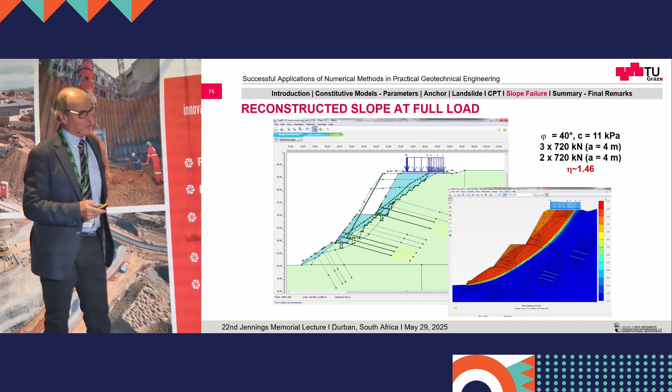And at the end, we put in some more anchors and played it safe here. I was having discussions with the guy who did the original design, saying it was all right, that it was a bit much. I said, well, I'm not signing if you don't do these anchors here, because we don't want any further risk.

Okay, I'm a little bit over time, but there's still a couple more slides - a summary of the results. So I think this fiber optic sensing, that is something I like.

It's really good. Now for the anchors, you could actually apply the sensor at the manufacturing stage. You don't have to do it on site, on the tendon, not in the grout. But the grout instrumentation was for research - you don't need that from a practical point of view. It was just to look at what happens inside it.

And the nice thing is, think about you have a wall with 200 anchors, and you want to check them after 15 years or so, the one on top of it. You have to close the road, find a way to go there. Now, if you have a fiber optic sensor, if it's long enough, you keep it somewhere safe, and you just have to come with the equipment to measure. It works - people do it now. So that's a bit of a game changer, I think, in monitoring.

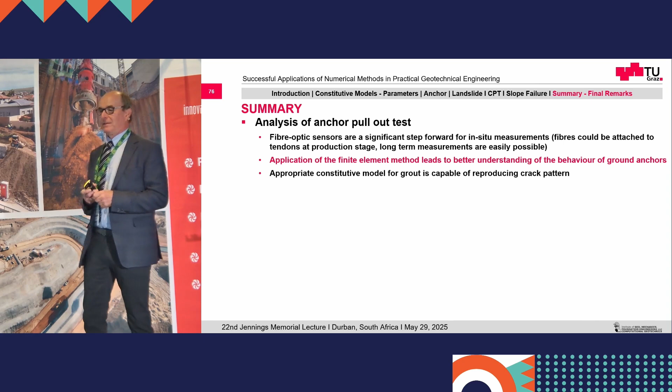I like that. And actually, Kenichi Soga, in his recent Rankine lecture, showed that as well. He had very impressive examples.

Okay, so for these landslides, again, we can check the different contributing factors. It's more powerful than doing a standard analysis. Penetration tests - I think we can use that in interpreting CPT a bit better, and other penetration methods.

And for slopes, limit equilibrium methods are not always conservative. I'm not saying we should get rid of them - that would be a bit too much, I think. But we should think of alternative methods.

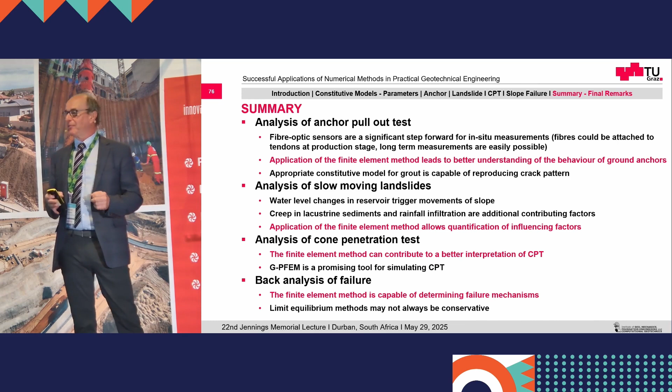For example, if you have your model already for working load conditions, why not use it for failure as well? Of course, you have to be a bit careful with all the tolerances and convergence criteria if you really go to failure in finite elements. That's correct, some people argue about that. But if you do it properly and have understanding, you would be able to do it.

So I think we should rethink a bit. We cannot say, well, we have done this for 30 years and that's fine. It's fine, I'm not saying this is wrong, but I think we can move a little bit forward. We also need experience with these methods, that's for sure. You cannot switch from one day to the other to a complete other method. But then we probably also have to rethink factors, etc. Okay, stiffness coming in, this sort of thing. So that is what I think.

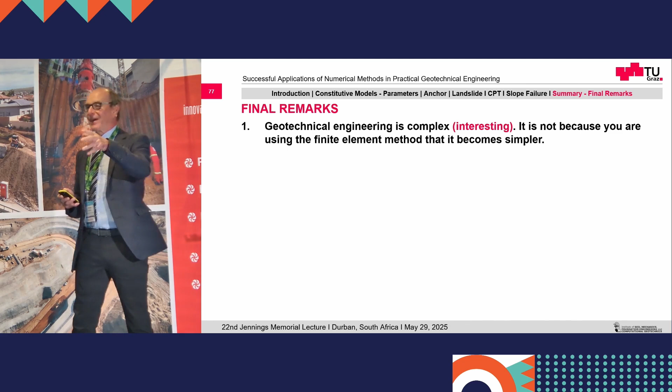Now, final remarks. I borrowed this from Cino Viggiani. He says geotechnical engineering is complex. I tell my students it's interesting. So don't do structural engineering, sorry for the structural guys here. This is boring, you know, it's concrete, you know the material, you know everything. Geotechnics is interesting, you know, you don't know anything. I usually say, student, the only thing we know exactly is the gamma of the water. The rest is uncertain. And I think, but that is challenging, and that is good.

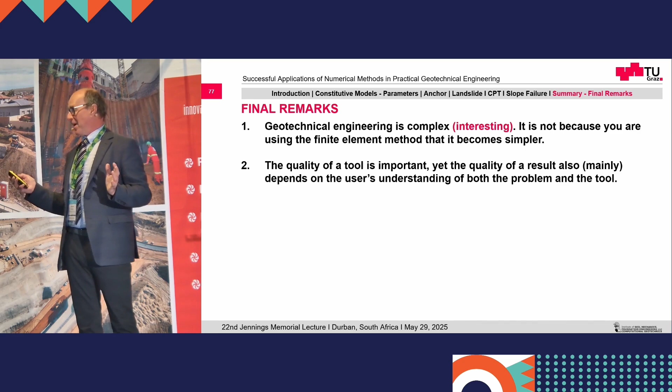And it's not because you buy a finite element code or FLAC finite differences that it becomes easier. No, it becomes more difficult because you have to understand this. But you gain, hopefully I've shown you a little bit more out of there. And then don't blame the code if it goes wrong. You know, any code, first 5 pages, disclaimer: you are responsible. So even if the code does something wrong, you have to check and make sure. So you need a nice tool, but also you need a good understanding.

And this, doing finite elements is not design, it's part of it, okay? So I call it a powerful tool, computer-aided geotechnical engineering, but it should not be like a cage. You know, you should not be confined to it. You should interact with all the other people doing that. Okay, that's almost my last slide. I have a few references selected.

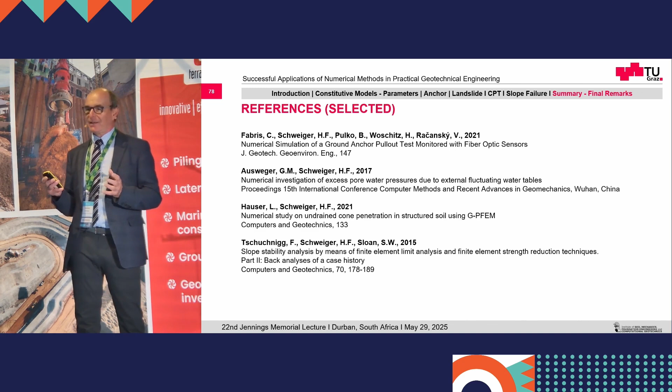But at the end, I promised I'd make a short remark on what everybody's doing now: machine learning, neural networks, artificial intelligence, all this. I'm not at all against it, but we have to be a bit careful. We should use the possibilities these tools offer, we should make use of it. But I found a nice cartoon in one of our local newspapers some time ago, and there you see this robot, artificial intelligence, on the couch of Sigmund Freud.

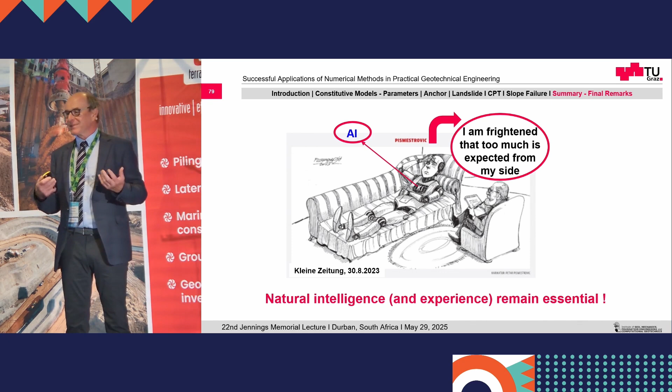And the psychologist said, what is your problem? And he said, I'm afraid they expect too much from me. So I think that's a bit, many people think that will solve everything. It will help us solve, but it will solve nothing. And I think for a couple of years, natural intelligence and experience will remain essential, because we have to check what these artificial guys are doing. And many times they probably will do better than we would, but sometimes they will do worse. And I think it's still our responsibility to check that and make sure we make the right decision.

And on top of it, I think you cannot sue a computer, at least not yet. With that, I thank you again for inviting me, and I thank you very much for your attention.

Thank you very much, Helmut. My PhD professor always used to say, fools with tools are still fools. And I think this is very, very similar. So...

The only thing that I took from there is one lecture is enough, probably similar to one parameter is enough, and I don't know whether one lecture is enough. There's probably so much more still to say. But I do thank you for coming out, enjoying the country, presenting the lecture. It was a wonderful insight that we are, in many aspects, on the precipice of numerical modeling. I think we've come a long way in many aspects, but we are still far off on other aspects. So thank you very much.

Okay, thank you for inviting me. It was a pleasure to be here. Okay, just a short... okay, thank you very much. Thank you very much. Thank you very much. Thank you.